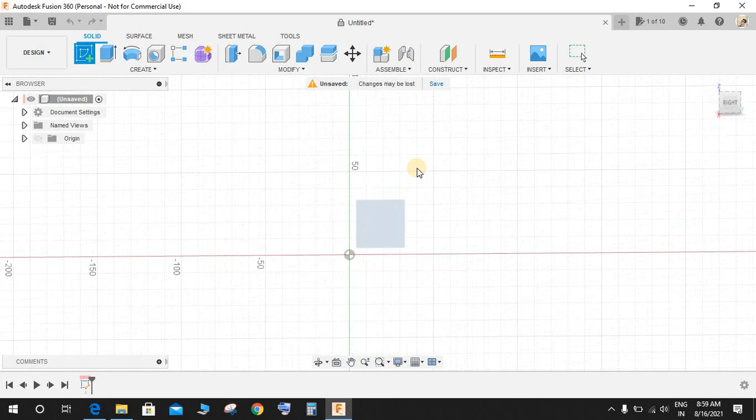So switch to new workspace, click on create a sketch, and on the front plane press L for line. I will start by making a simple T-like structure without any dimension. We will be providing the dimension very soon. So let's make a T. Now once done, go back to your drawing.

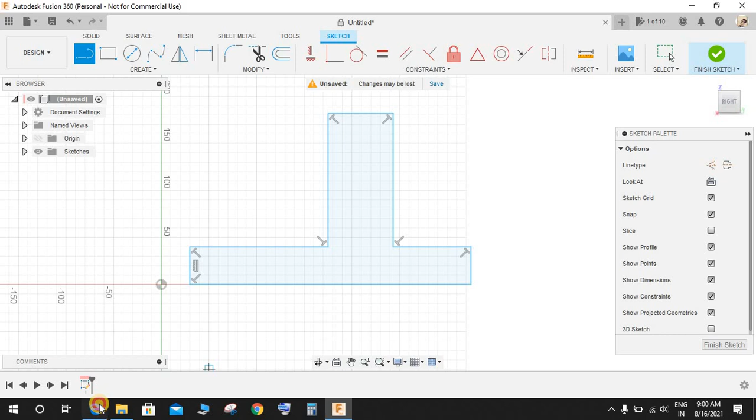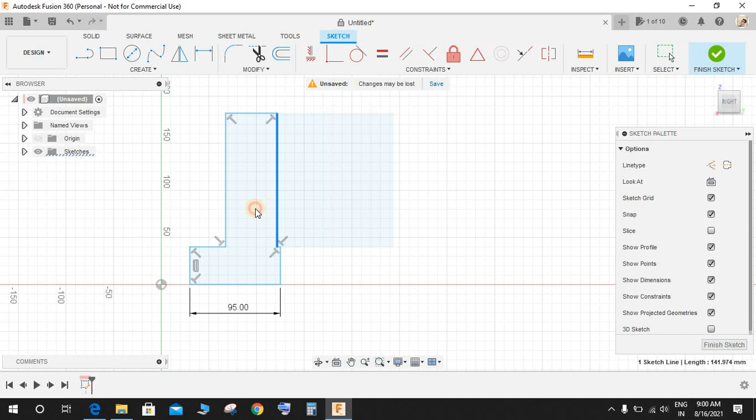Now you guys can see the dimension from the farthest most point is 95, and the thickness of T at this very point is 14 mm. So press D for dimension, select this line and give this a dimension of 95 like this. Now to make the T look more original, switch the place and press D for dimension again and give this thickness as 14 mm like this.

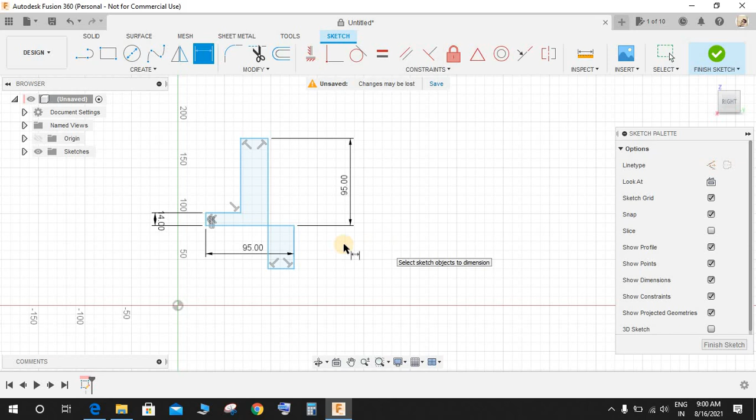Now once done, the total height from this point to this point is 95 mm. So press D again and give this a dimension of 95 like this. Now again press D, give this also the dimension of 14 mm.

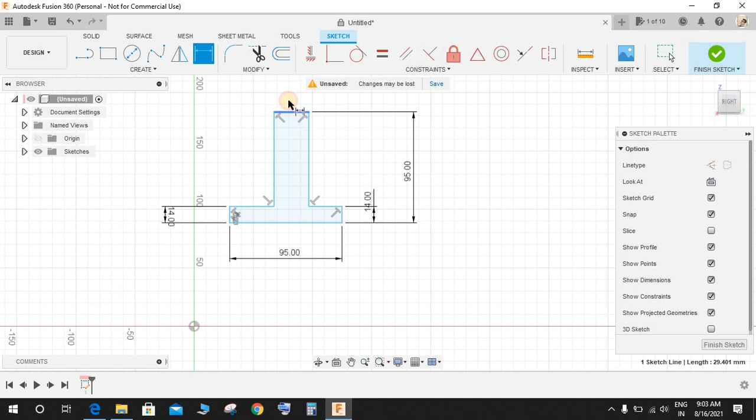Now for our next dimension, as you guys can see, the thickness at the top portion of the T is 15 mm, and it's 25 mm offset from this very point. So press D for dimension and give this 15 mm, and from this point to this point give this dimension as 25. Now our sketch is fully constrained, as you guys can see.

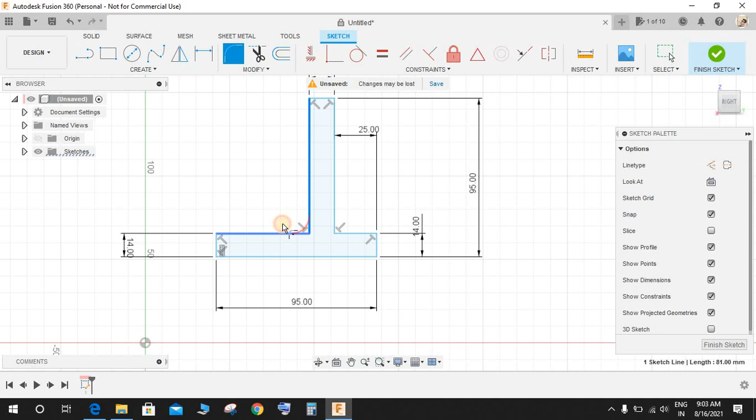Now the only thing left is to give this radius. So here the radius is 35 and here the radius is 20. So for that, just go to fillet, make it a radius of, let me just check, 35 and 20. So make it 35, and for here right click and drag upwards, repeat the command and click on these two lines, press T, and you may finish the sketch.

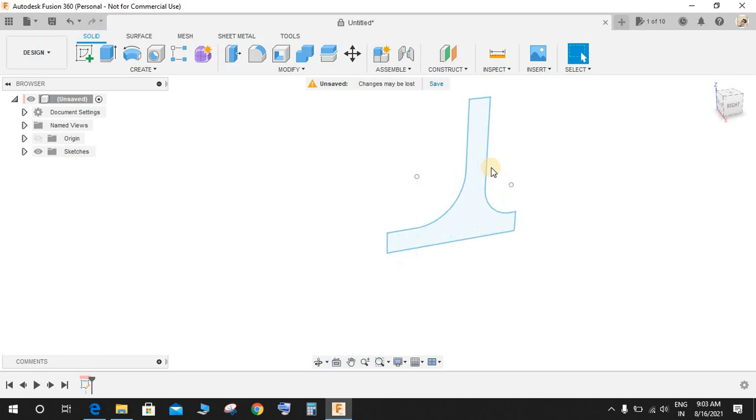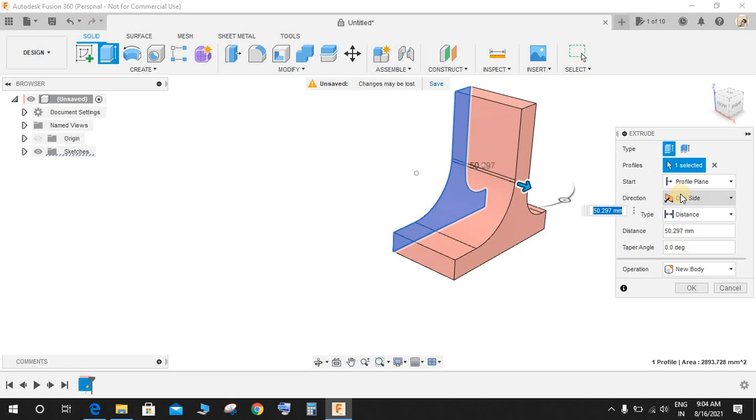Now once done, I'm going to extrude it, and the dimension for the extrusion can be seen from this point is 60. So click on extrude and extrude it like this. And now to make it symmetric from the origin plane, I'm going to mirror it. So direction to be symmetric and whole length, and the whole length is going to be 60. Click on new body and press OK.

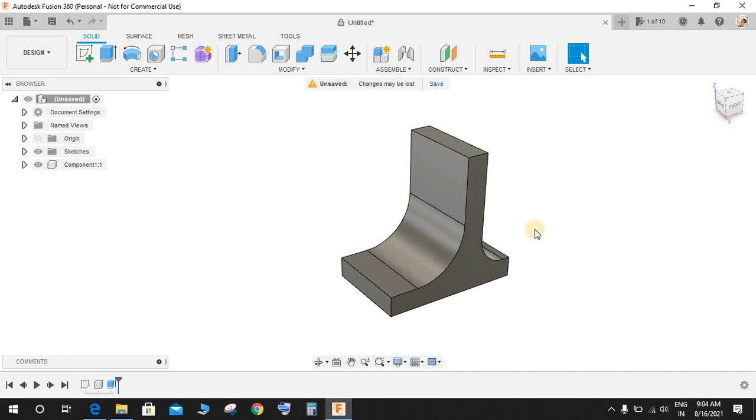Now you may be wondering why my component automatically got a yellow color. So basically there's a shortcut called Shift plus N that will enable Fusion 360 to assign color to each component. But remember, this is not appearance. For appearance you need to go to the appearance and manually apply it. This is just visual. So once done, let me just bring back the origin planes.

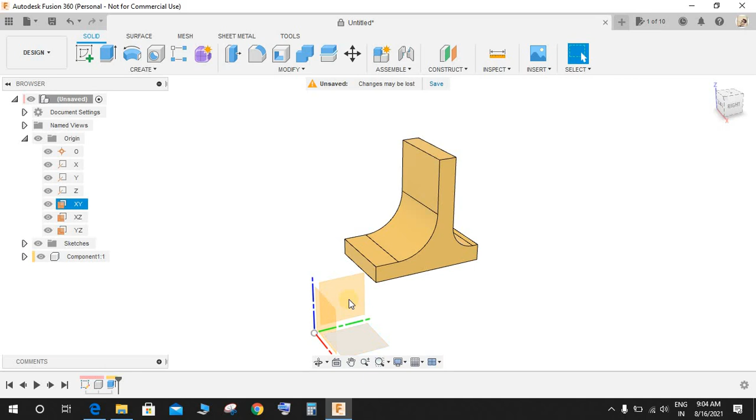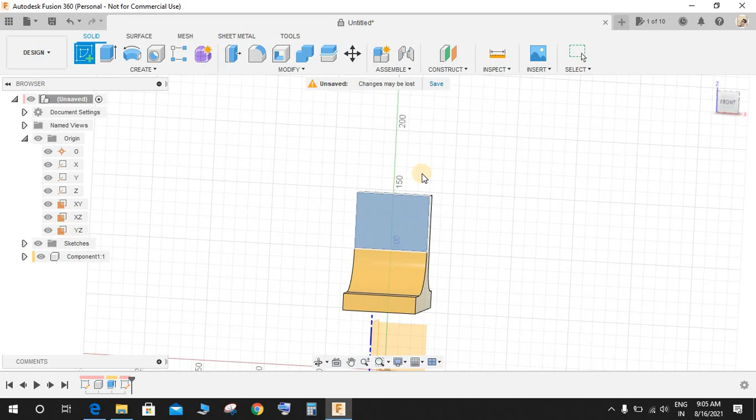Now we will be making this U cut. As you guys can see, the dimension is represented here. So I'm going to create a sketch on this very face. The dia is 16 and it is 20 mm below from the top surface. So click on create a sketch from this point, press C for circle, and on the very center

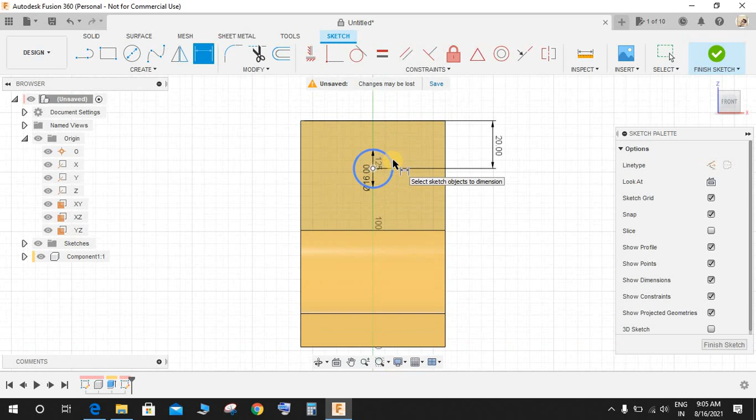make a circle of 16, press D for dimension and give the dimension from this point to this point as 20 mm, like this. Now again press L for line, and from this point draw a line like this. Again press L, from this point to this point, draw a line. You don't have to close the sketch. Fusion 360 automatically detects what you're trying to do. Now click on extrude, select this profile and make a beautiful extrude cut here, and this is done.

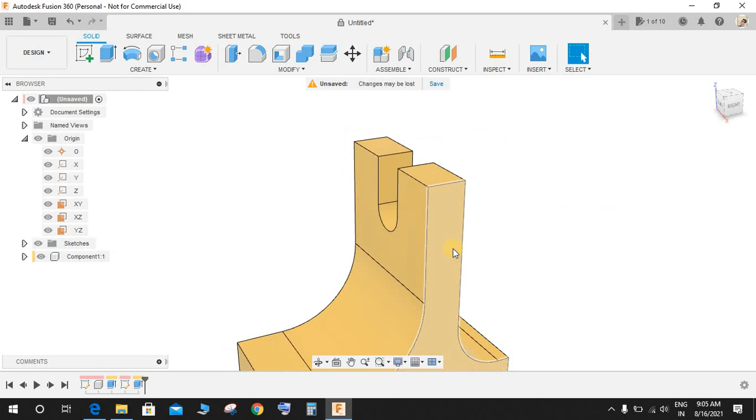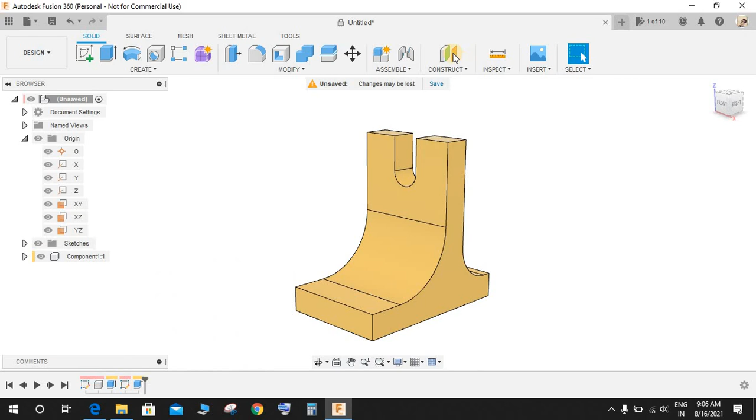Now for the next thing, I'm going to make this yellow profile. As you guys can see, the dimension from the bottom face to the topmost face is 50 mm. So I'm going to construct an offset plane, and the reference plane is going to be our bottom plane. I'm going to offset it upwards up to a distance of -50 and press enter. Now we have a plane here. Click on create a sketch and bring the sketch like this.

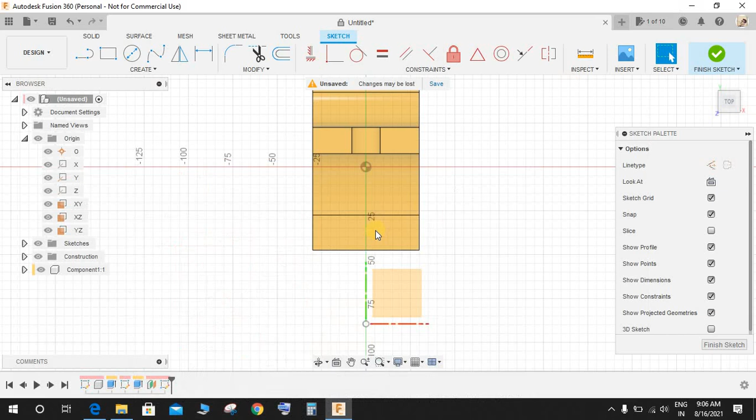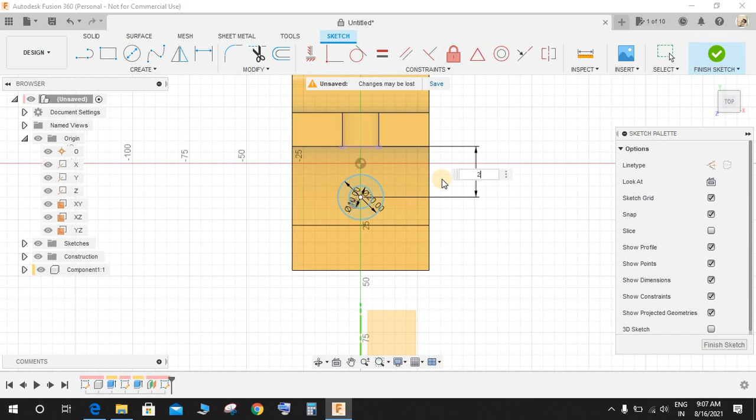Now for the hole, you can see the outermost circle is 20 and the inner one is 10 and the dimension from this wall is 20. So press C for circle. First circle is going to be 20, again press C, and second circle is going to be 10 mm. Press D for dimension. From this point to the circle, this dimension is going to be 20 mm, and press OK. Now press L for line, but before that, click on project and project all these edges and press OK.

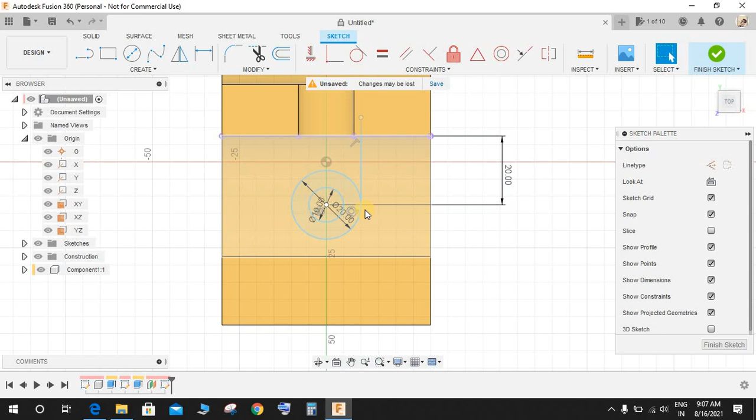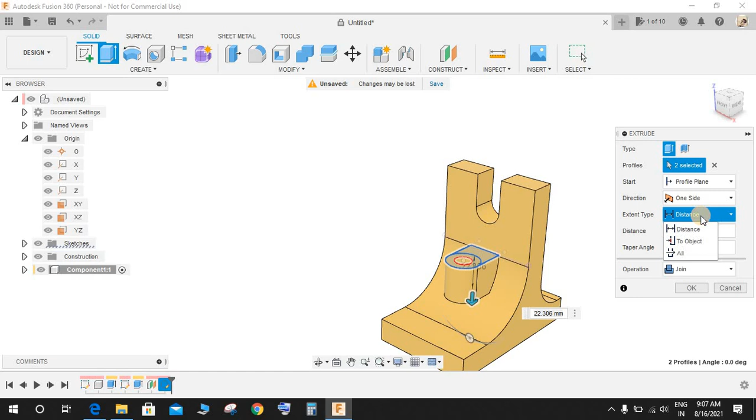Now draw a line from this point to this point, and again draw one line from this point to this point. Now we have a closed sketch. Click on finish the sketch, click on extrude, select this profile and extrude it like this. This is going to be the join operation and the extent type is to be all, and click on OK. Now here we are done.

Let me check if anything is left. No.